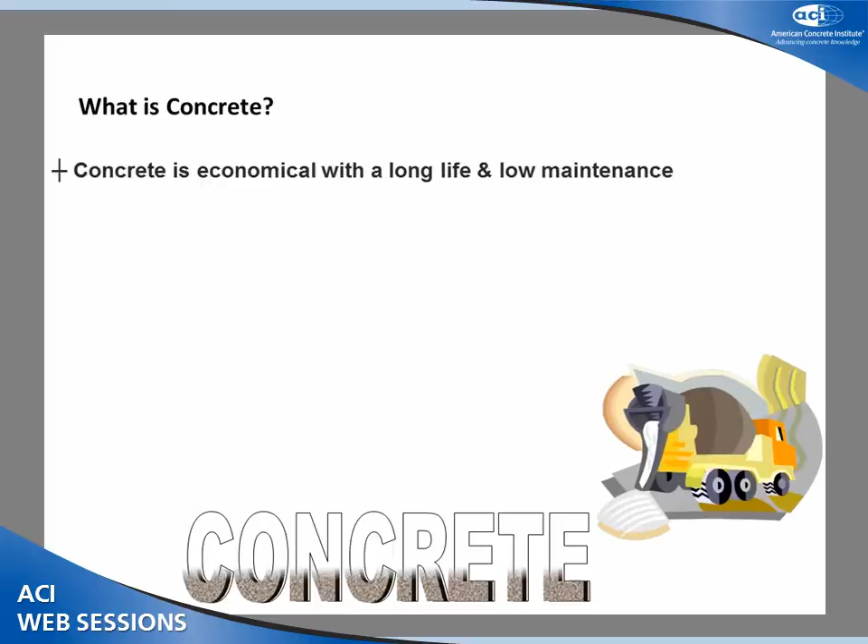So what is concrete? It's a really cool material. It's economical, long life, low maintenance, doesn't rot, cast it in the field, doesn't burn, bugs and critters don't eat it. We use about 12 billion cubic meters per year globally. That's a lot of stuff.

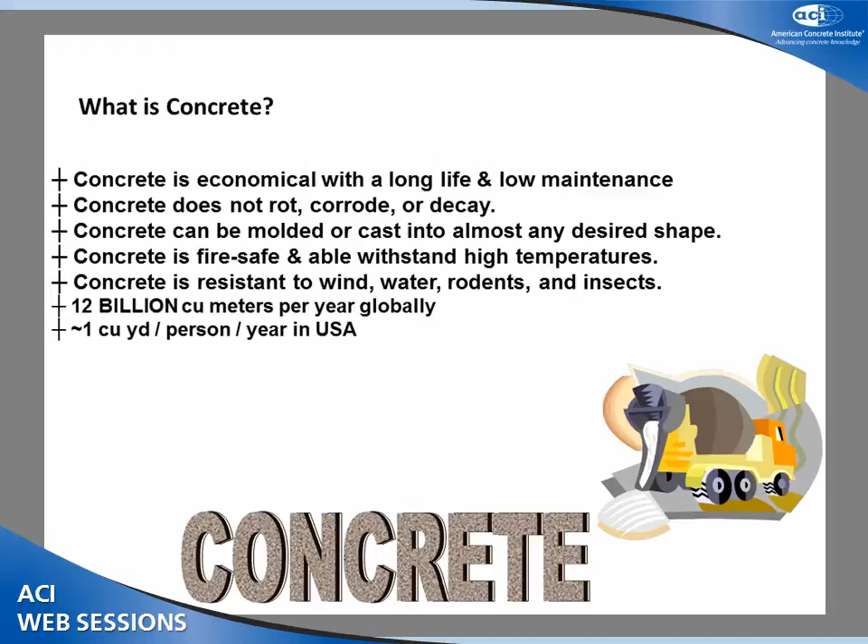In the U.S., about 1 cubic yard per person per year. Since 1930, over 70 billion cubic meters have been used in the U.S., and we currently have about 10 billion cubic meters that are more than 20 years old.

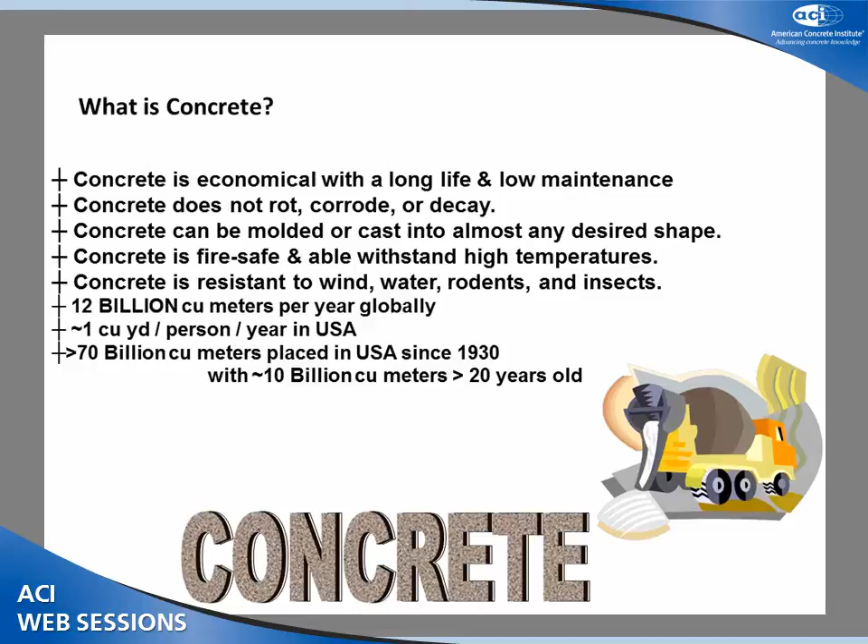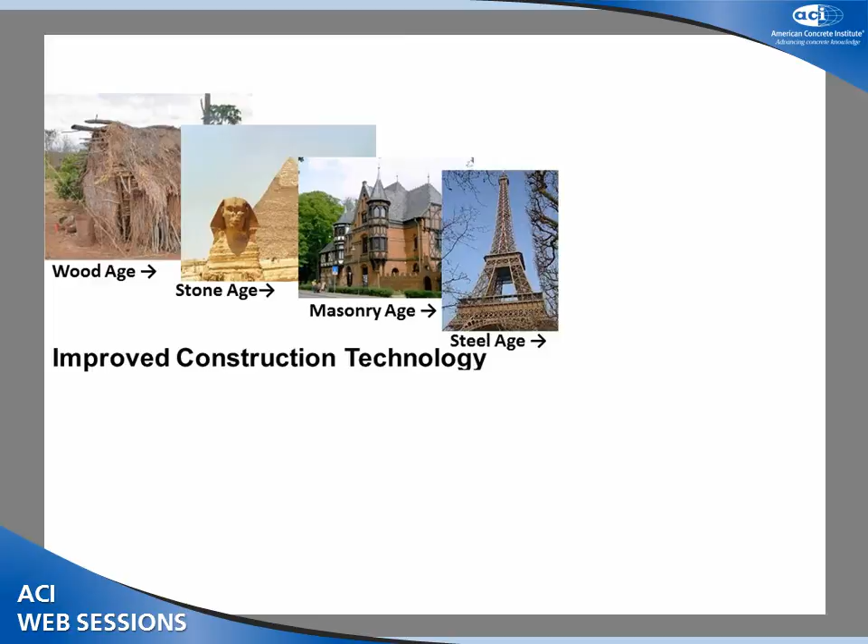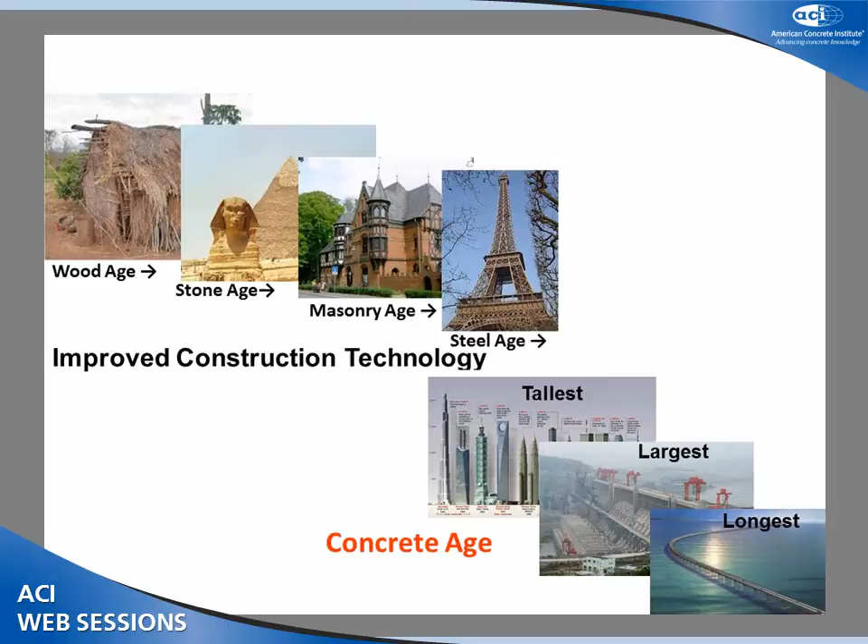So, looking back in history, we started out with the wood age. We got better building techniques. Then we moved into the Stone Age. Then we made synthetic stone and called it masonry. Then the Steel Age. Well, folks, today we're in the concrete age. Our tallest buildings, our largest structures, our longest bridges are all made out of concrete. It's not going to go away. But it's not perfect.

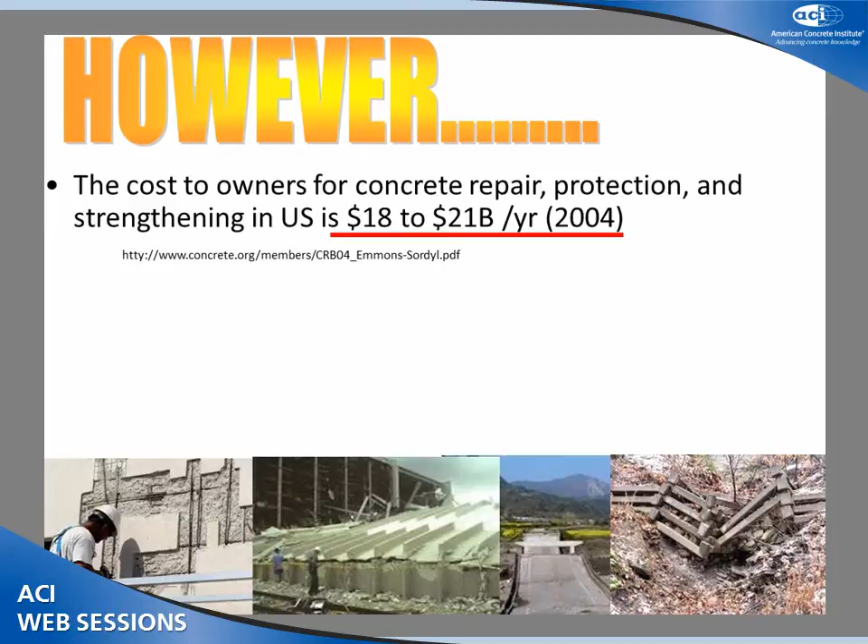Some estimates put the cost of concrete repair and protection at $18 to $21 billion a year in 2004. Just the cost of corrosion of concrete reinforcement, $125 billion per year. Those figures don't add up. Nobody really knows.

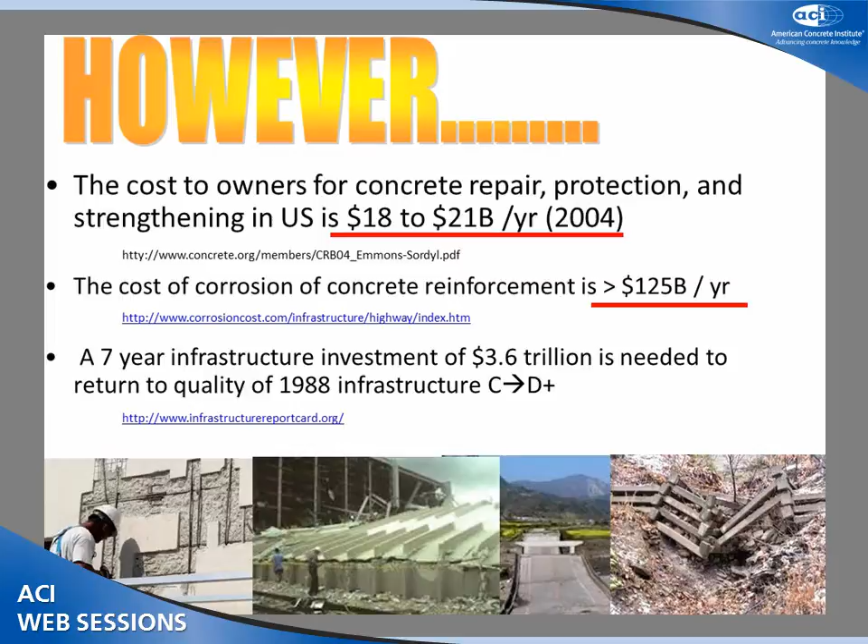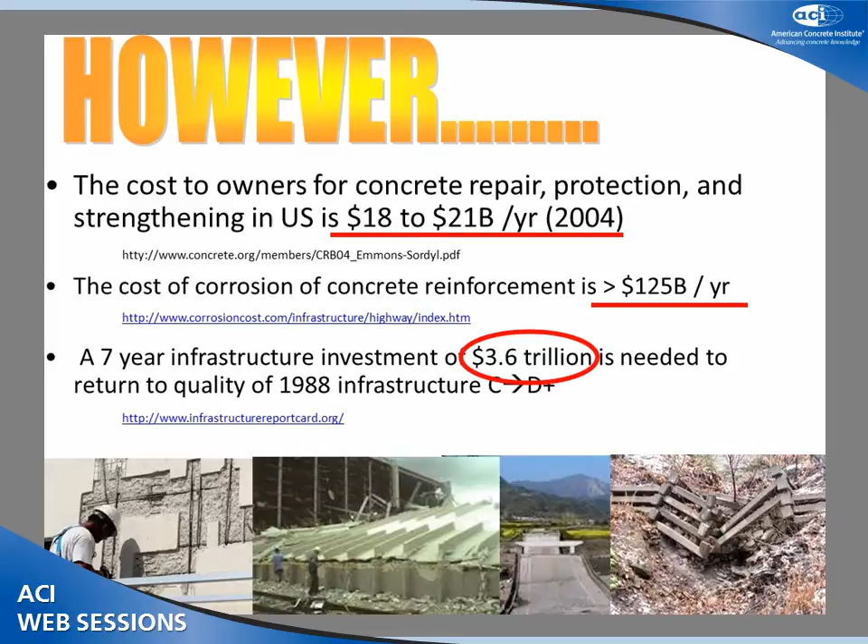Just a couple of weeks ago, the American Society of Civil Engineers came up with a new report card. They say we need $3.6 trillion to return our infrastructure to the quality it was in 1988. That's over the next 7 years. That's a lot of money.

So, being in the concrete repair business is a pretty good business model. It's going to have a lot of work.

Why does concrete fail? I say it fails due to the 3 Ds. It starts out with design and construction errors. This is a very famous example, the Leaning Tower of Pisa. If they paid attention to how the foundation was built, we wouldn't have this famous landmark.

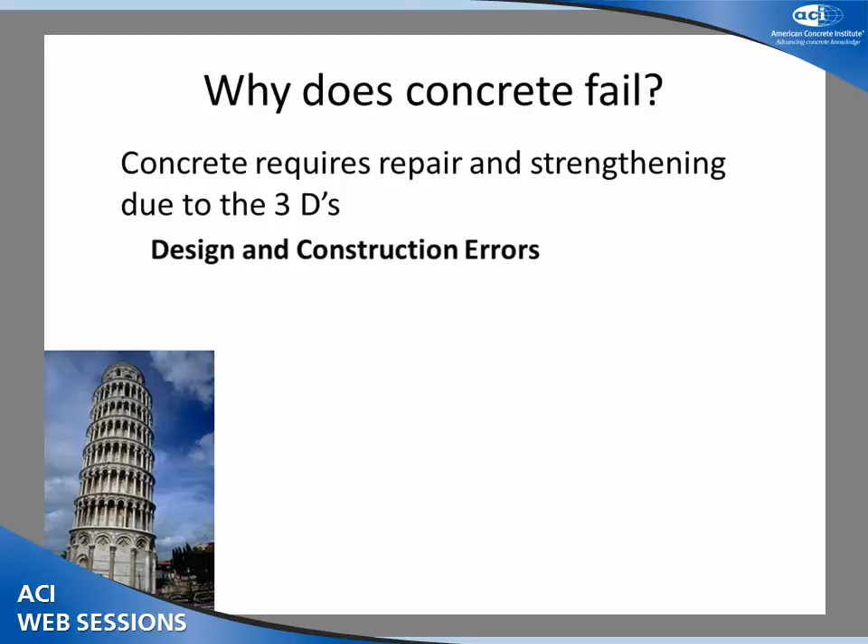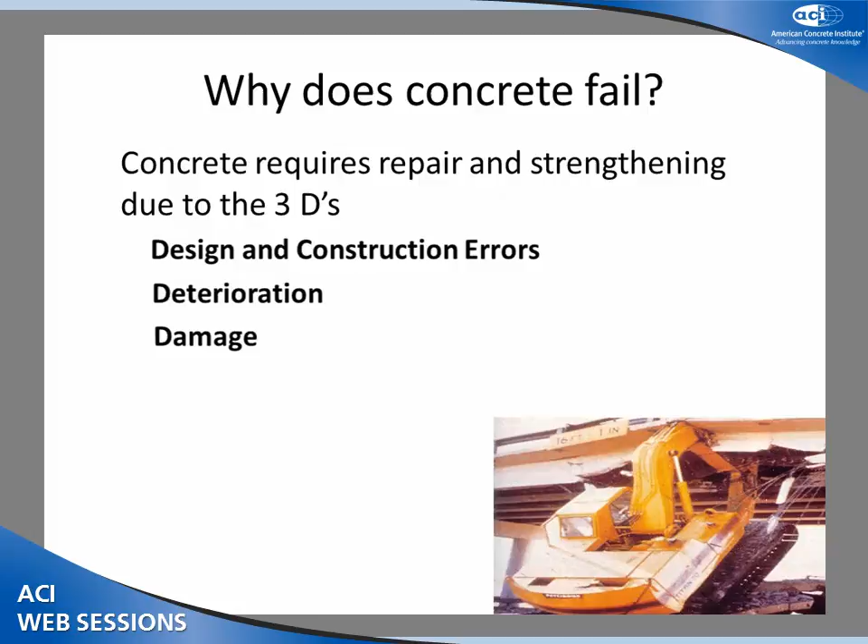Those get magnified through deterioration. That's Mother Nature just doing wear and tear on things. And then damage. Incidents like trying to put a 24-foot backhoe under a 16-foot bridge.

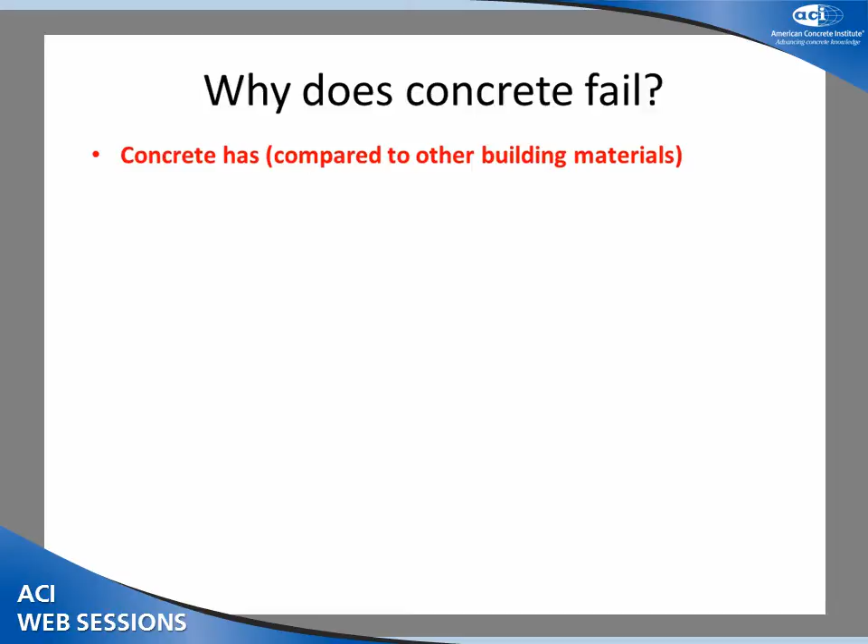So, concrete has some Achilles heels. It's not a perfect material. It's relatively low tensile strength, about 10% of its compressive strength unless you do some funny things like put fibers in it. Low ductility, it's brittle. It's really heavy for as strong as it is.

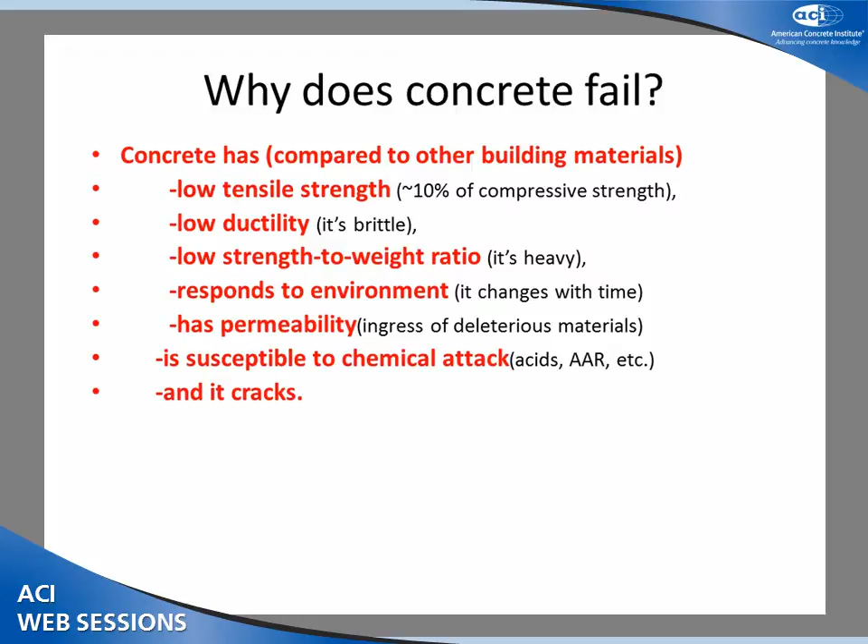It changes with time, responds to its environment. Has permeability. It's a hard, wet sponge. And it doesn't like certain chemicals, especially acids. And it cracks. That's the most common failure mechanism for concrete, it's cracking.

Furthermore, steel corrodes. Anytime you put steel in a concrete structure, you're basically installing a time bomb. Sooner or later, that steel is going to corrode. That's just thermodynamics. It may be 100 years from now, it's going to rust. When it rusts, it expands, and all of these properties change as the concrete ages.

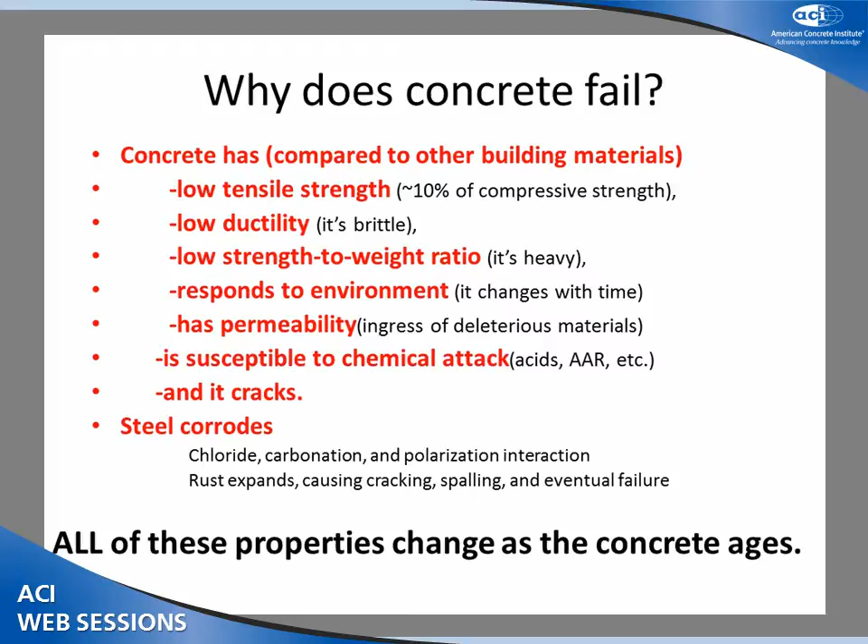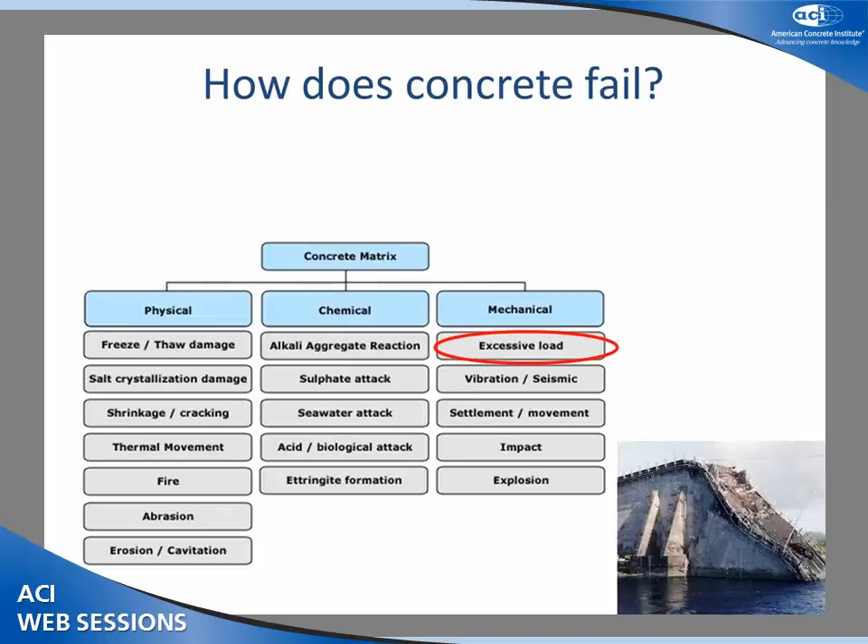A little more detail. We've got freeze-thaw damage, salt crystallization damage, shrinkage and cracking, thermal movement, fire damage, abrasion, erosion, cavitation, alkali aggregate reaction, sulfate attack, seawater attack, biological attack, excessive loads, vibration and seismic incidents, impact, explosion, and reinforcing steel issues with 3 primary mechanisms: carbonation-induced corrosion, chloride-induced corrosion, and stray currents, or polarization changes in the steel.

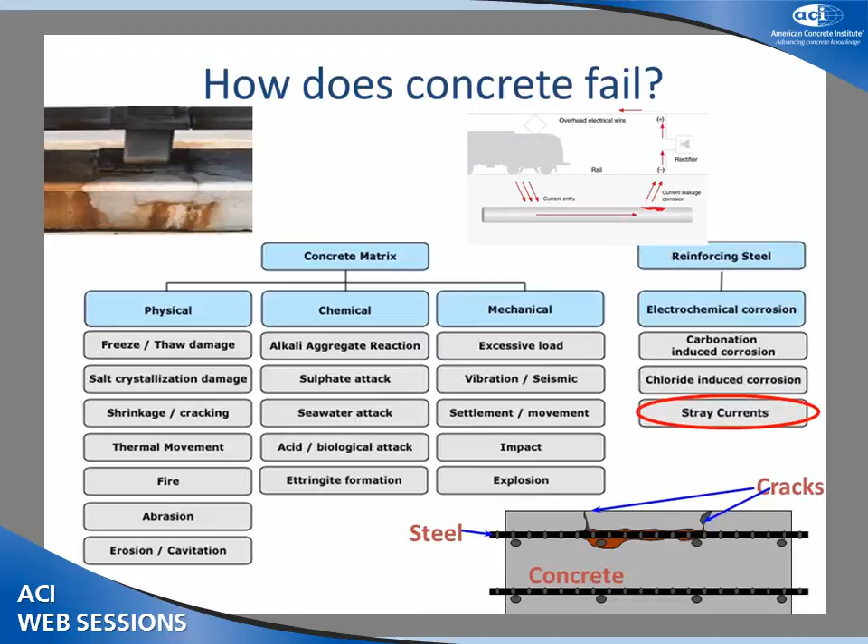All 3 of these work together synergistically as well to make the steel rust.

So what do we do in new construction? This comes from a website I really like, called despair.com. They take all of these motivational posters and change the captions. Mediocrity: it takes a lot less time and most people won't notice the difference until it's too late. Right back there with those design and construction errors.

What does that mean? Usually you inherit the problem, but pay attention to the design. If you only got decent cover over the reinforcing steel, you solve so many problems. Bear in mind that reinforcing steel doesn't stay where you think it is when you place the concrete.

Use a low water to cementitious material ratio, and use admixtures as appropriate. They allow you to tune the mixture to do wonderful things. Have the proper consistency for what you're trying to place the concrete at, and make sure it's well consolidated.

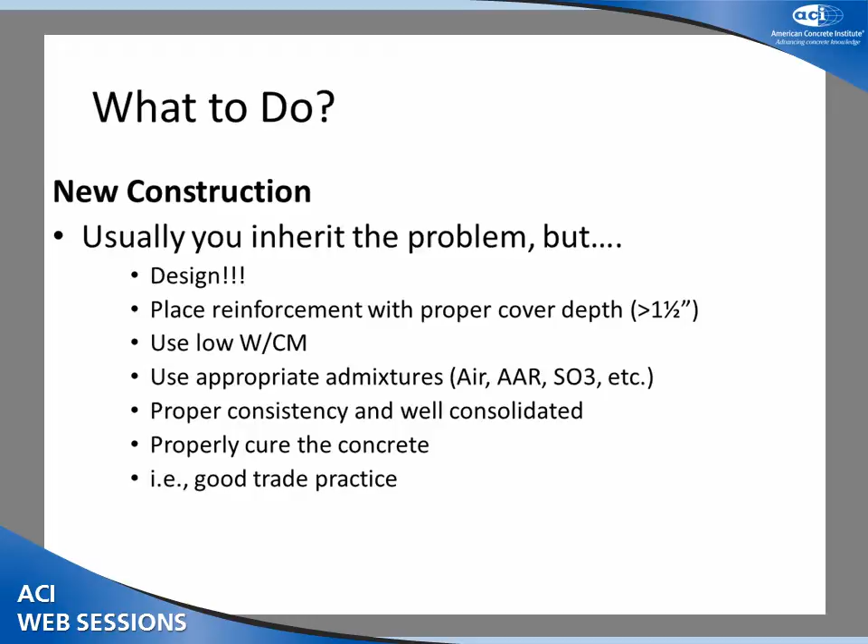Above all, properly cure the darn concrete. Keep the water in it until the cement can hydrate. In other words, read ACI. We've got all of this documented. We collect our collective wisdom and publish it in documents. Bottom line, the devil is in the details.

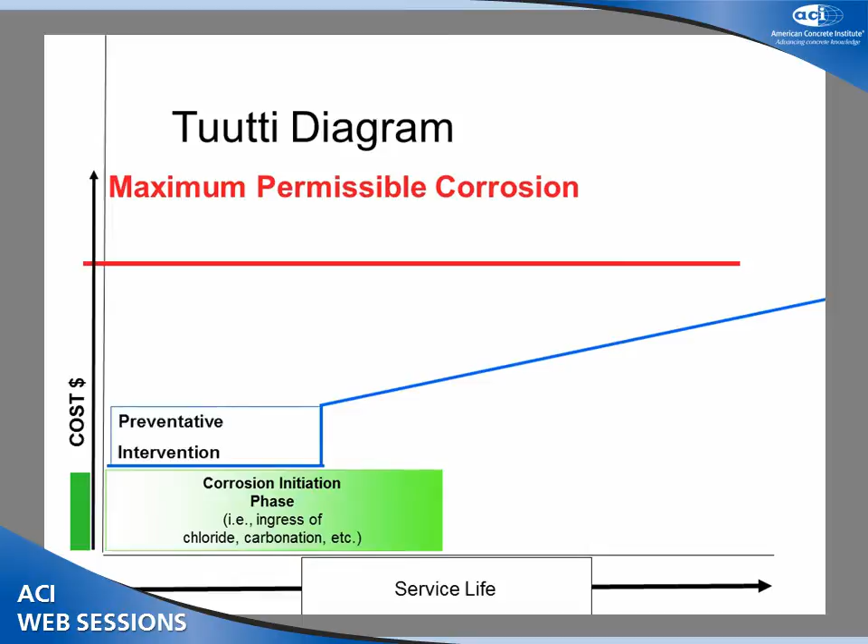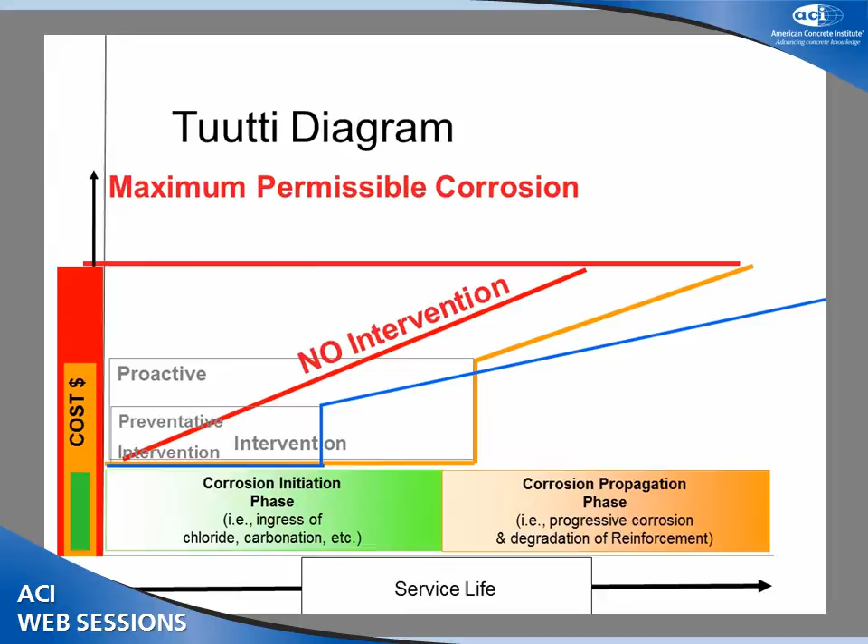Now, Tuutti is a Swedish professor, pretty well known about corrosion and so forth. What he says is, initially, if I catch corrosion in concrete reinforcing steel, I have a low cost. The longer I wait, the shorter the time the structure lasts and the higher the cost. Doing nothing is the highest cost you can have. So what does that mean? Do unto your future before your future does unto you.

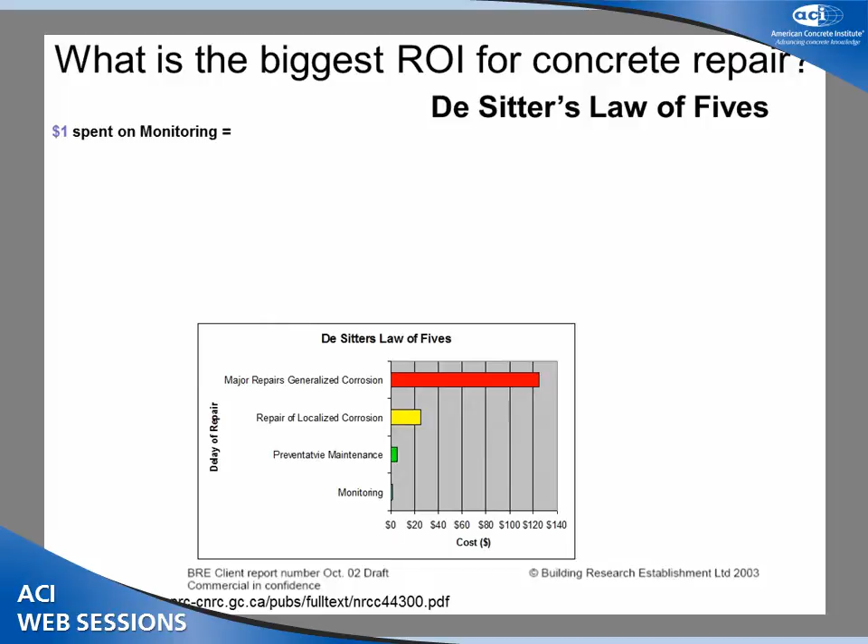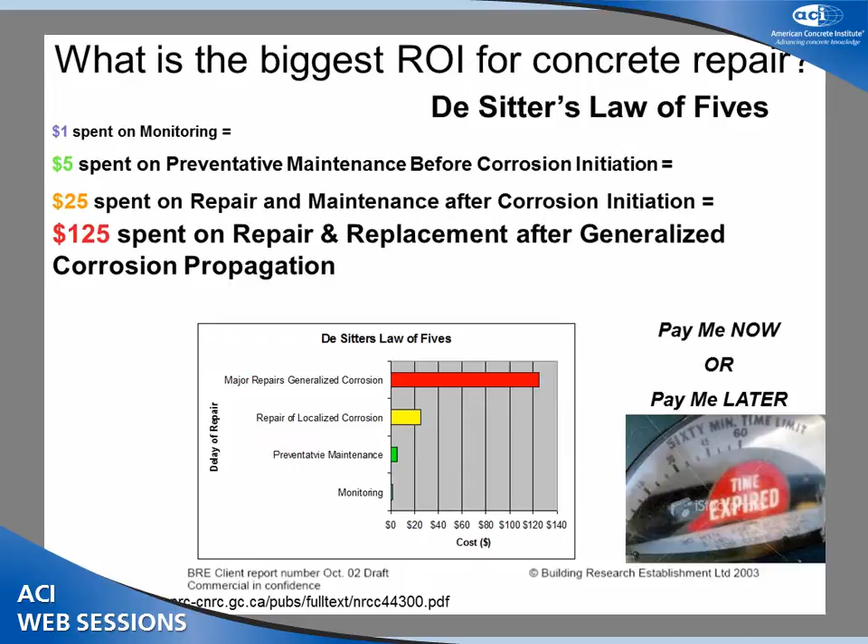Another guy I really like is De Sitter, I think he's from Denmark. He has something called the Law of Fives. He found that if you spend $1 installing monitoring in a structure so you know what's going on before it's too late, that's the same as spending $5 on preventative maintenance before corrosion initiates, $25 on repair and maintenance after it's initiated, or $125 after you've got generalized corrosion, that is rust coming out of the cracks in the concrete. So you can pay me now or pay me later.

In concrete repair, in the process, what you see are the effects of design, durability, and deterioration and damage. You better figure out the cause. One of the beauties of the concrete repair industry is you're going to get the chance to do it all over again if you don't. Then you make a decision: do I repair or not?

A lot of that's determined by how well the concrete was maintained. The trick to concrete repair having a long life is never having to do the repair, to keep bad things from happening before it's too late. Unfortunately, all too often we get to the repair, and this is our option: demolition.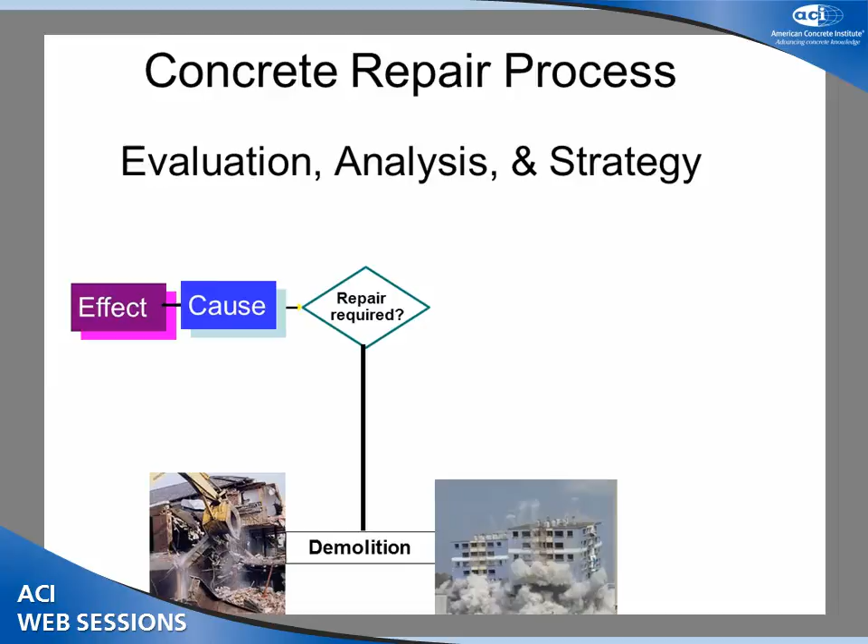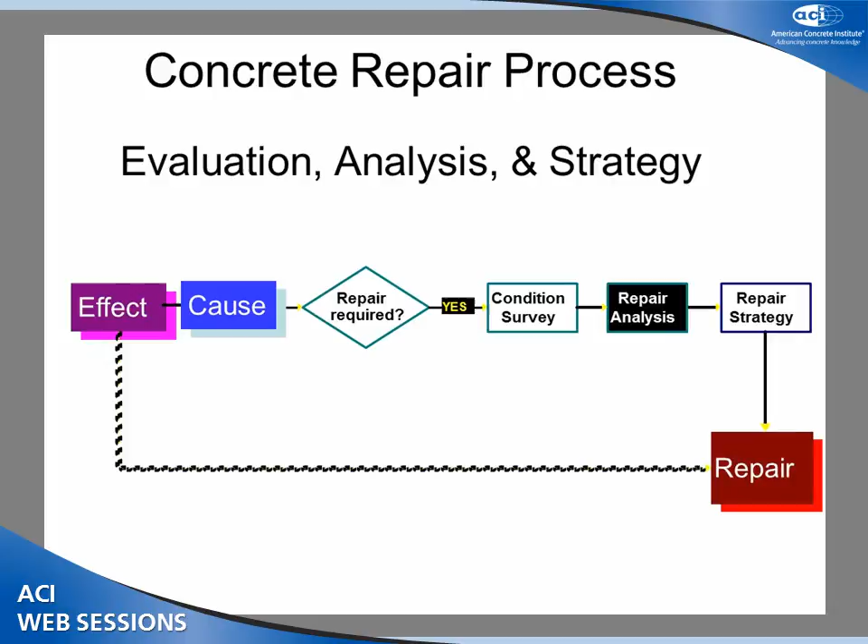But if you're going to repair, do a condition survey. Find out how bad the situation is. Analyze the repair. Develop a strategy. Do the repair. And do maintenance on that repair.

A little more detail. There's the 3 Ds, as shown by leakage, settlement, wear, spalling, disintegration, cracking. Is repair required? Is it a life safety issue? Is it leakage? Is the structure any longer functional? Does it just look plain ugly?

The condition survey: you evaluate, quantify, and document what's going on. Your repair analysis considers both what the owner wants, he's the guy that's paying the bill, and what's possible to do as an engineer. The repair strategy, all three of these came down at the same time. What kind of surface preparation do I do? What's my materials options? What's my methods for doing the repair?

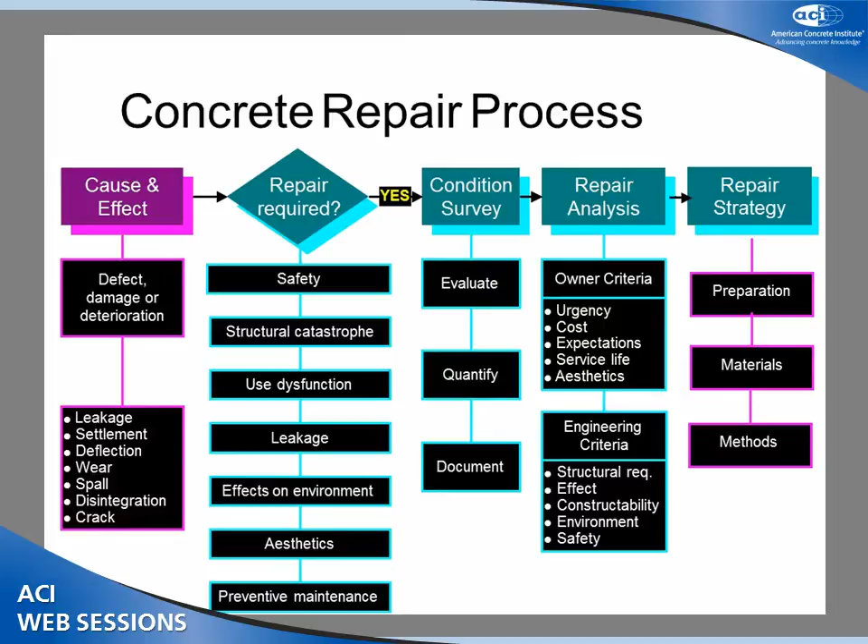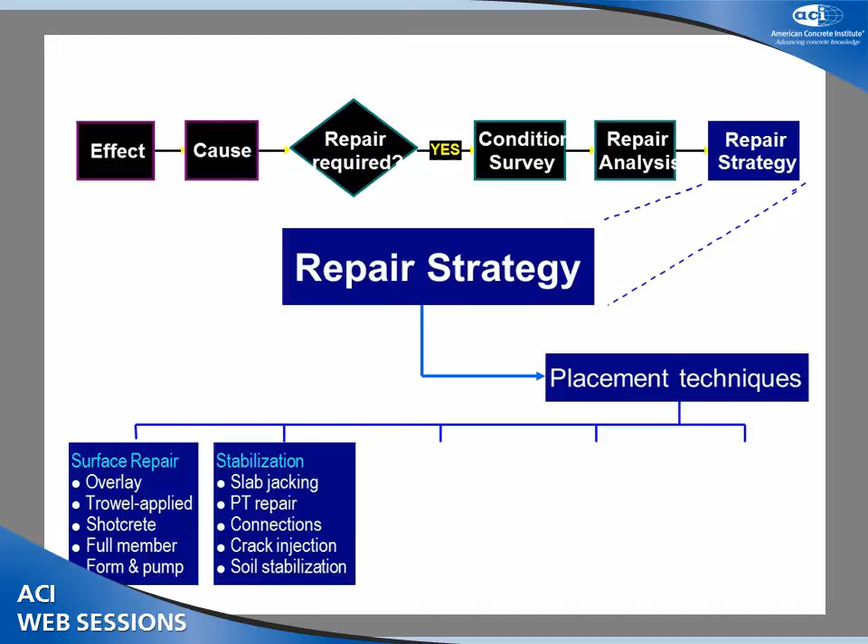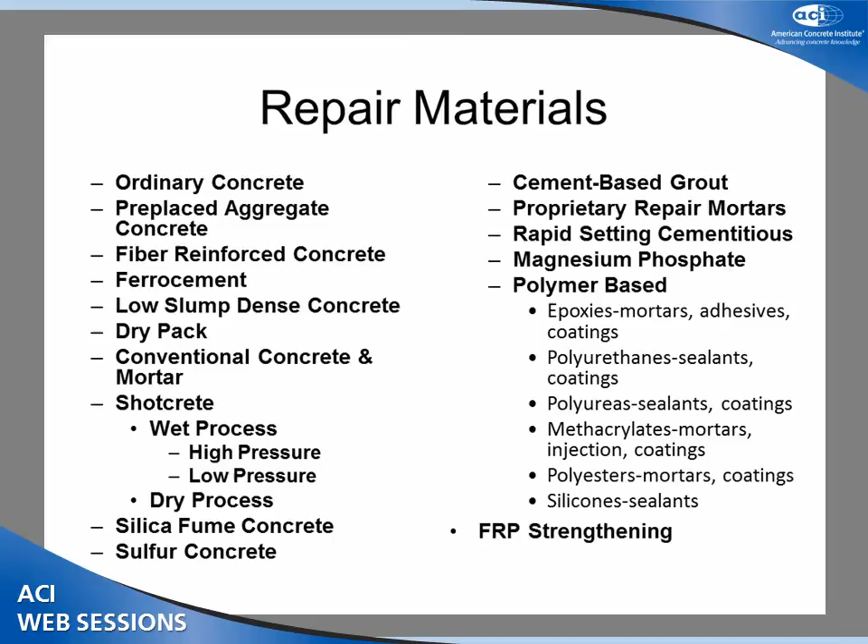A couple of comments on that. We've got all kinds of placement techniques for surface repair, stabilization, protection, waterproofing, and strengthening. We've got all kinds of repair materials. These are the ones listed in ACI 546. Each one is appropriate in some situations, but not in others.

I really like this diagram, probably because I drew it. What this says is, how big is my repair? That determines not only how I mix it. If I'm just mixing less than 1 unit, fixing a couple of cubic inches, I don't even think about shotcrete or mobile mixers. I'm mixing it in a trowel and pail or a drill and pail. And it's pretty much always a hand application.

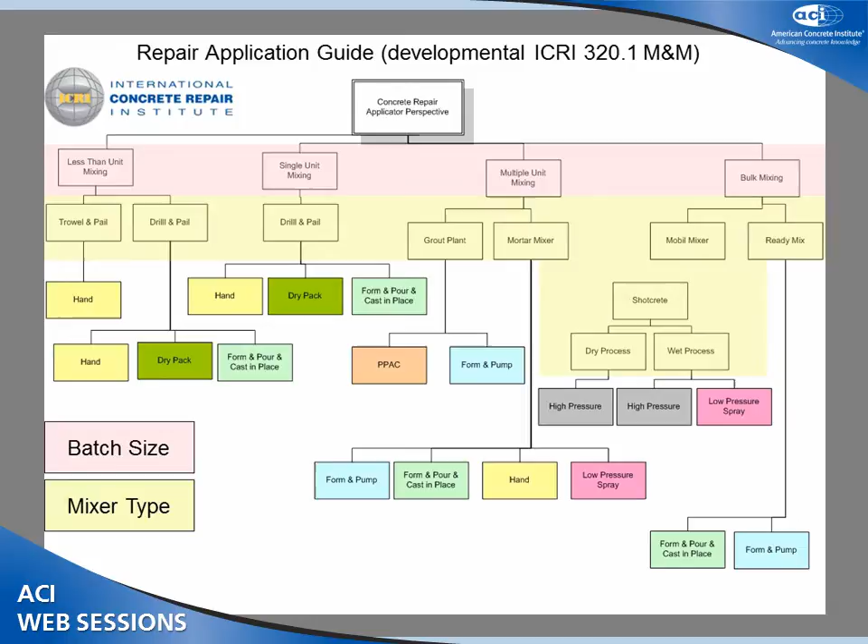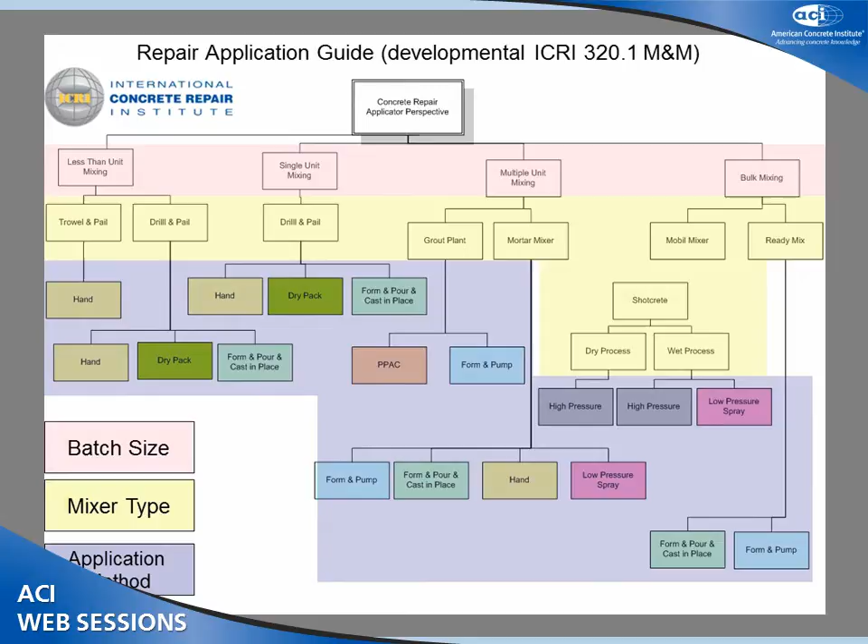When I get serious and start mixing multiple units, cubic feet, I'm going to be doing a drill and pail, or maybe a grout plant, or maybe a mortar mixer. And that further determines what kind of applications I'm doing. I'm no longer just doing hand repairs, I'm doing things like pre-placed aggregate, form and pour, form and pump. With shotcrete, I'm getting really serious about things.

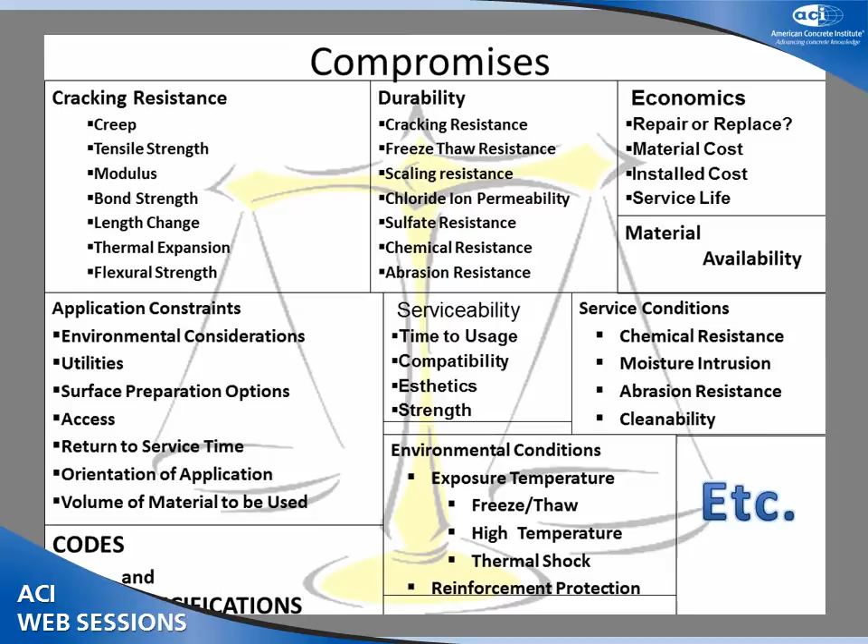Bottom line, selection is a series of compromises. Try to balance all of these factors to make the best decision. It's not easy. We're working on getting there, but trying to think about all that makes my head hurt and where my hair went.

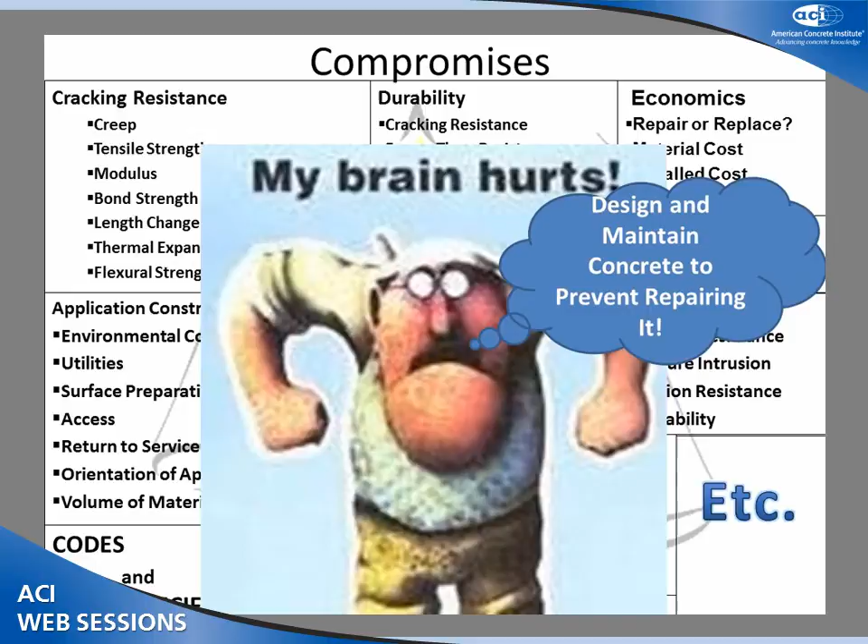So the trick is to design and maintain concrete to prevent having to repair it. Now, what I was actually supposed to be talking about is early age repair material properties. So in existing construction, the real secret to concrete repair is knowing who to blame for your failures.

Okay, so I inherit the problem. Address the problems early in the life cycle. Find the root cause of what's going on. You get a chance to do it over. Fix cracks, little cracks tend to become bigger cracks. Yes, there is autogenous healing that can happen. Don't bet on it.

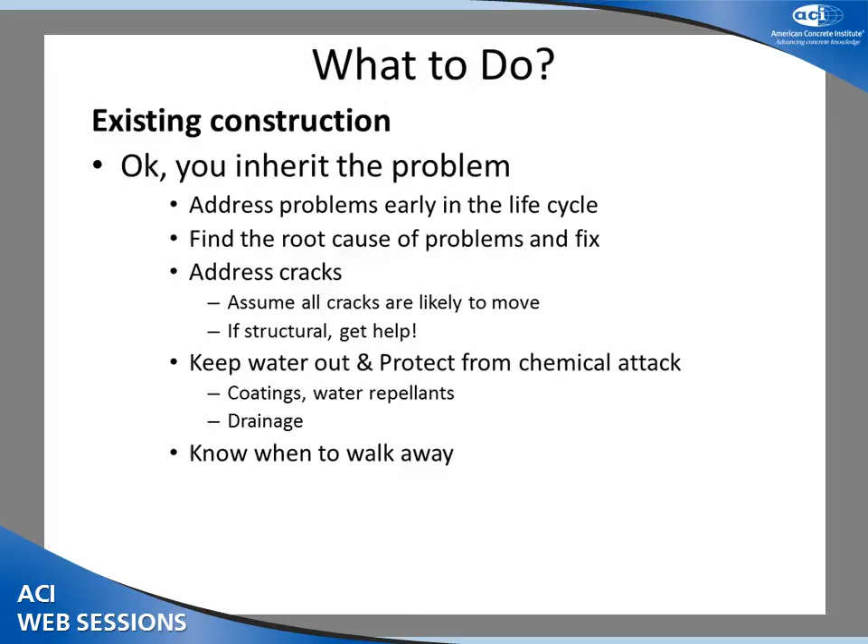Keep the water where you're going to need it while you're curing the concrete, and after that, keep the water out. If you keep the water out of the concrete after it's cured, so many of your problems go away: no more freeze-thaw deterioration, sulfate attack, alkali aggregate reaction. And know when to give up and walk away.

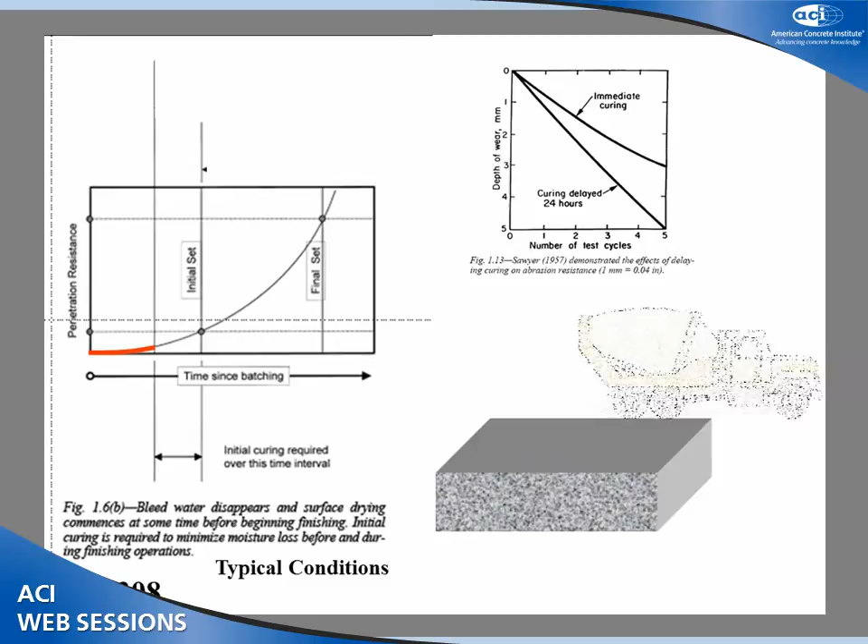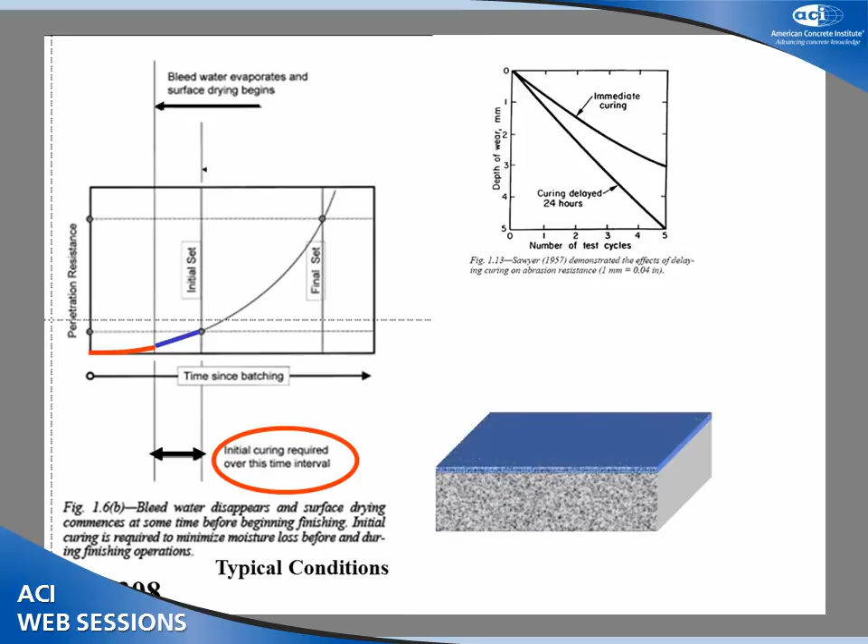Okay, a little bit about curing. Anybody know what initial curing is about? Initial curing is I got the concrete placed, the bleed water has disappeared, but it ain't strong enough to finish yet. I get all these plastic shrinkage cracks. So by doing initial curing or intermediate curing before I can finish it, I'm keeping the water there where it belongs.

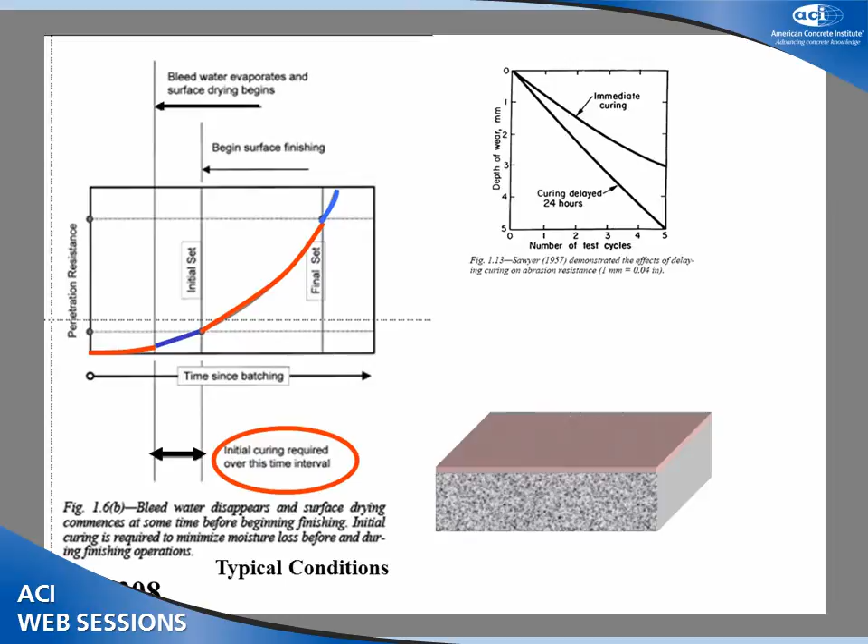Now I finish the concrete and I perform conventional curing. This doesn't cost a whole lot of money and it solves a lot of your problems at the get-go.

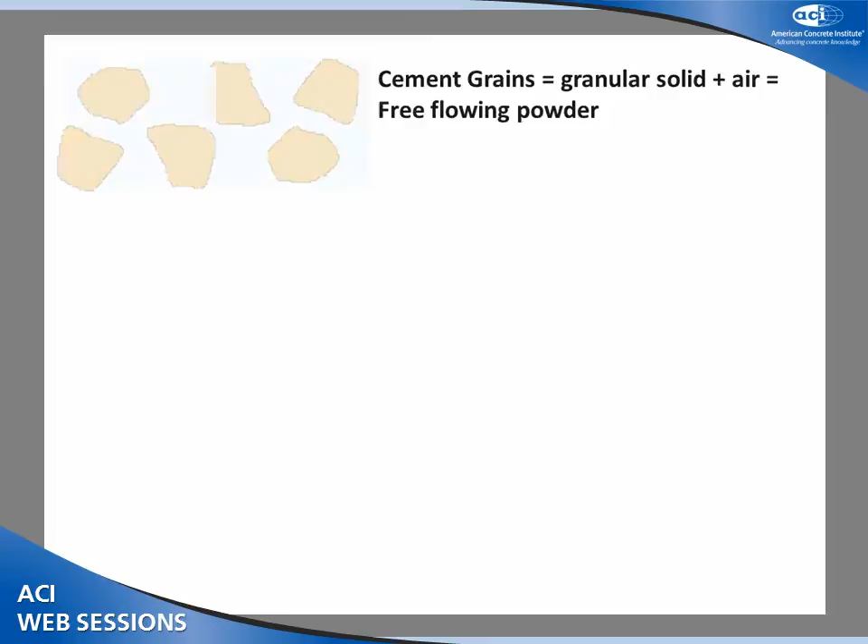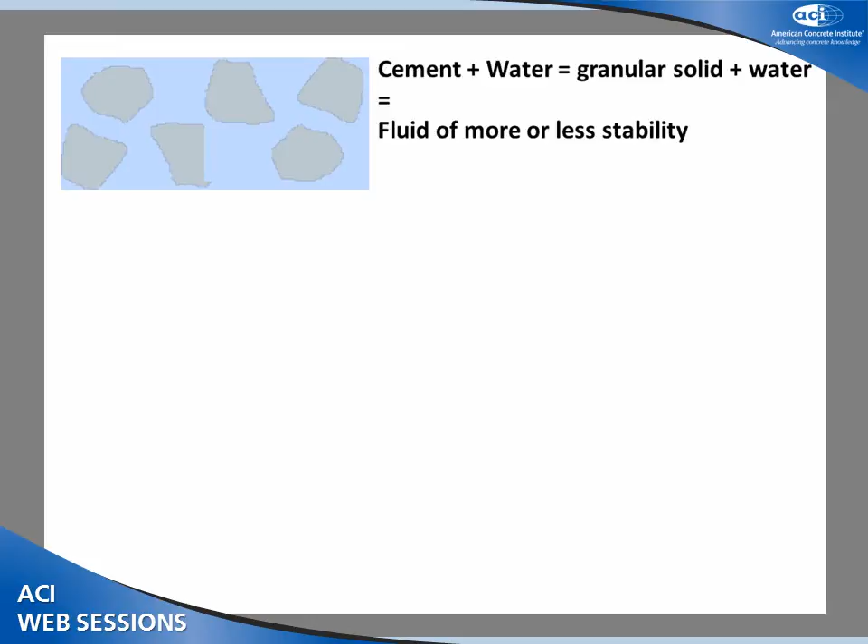When we start out with cement, we got cement grains. It's free-flowing powder. You mix it with water. Now you get kind of a suspension of particles in water as more or less stable mixture. Bleeding is when it ain't so stable, and I can get settlement shrinkage. I place the concrete.

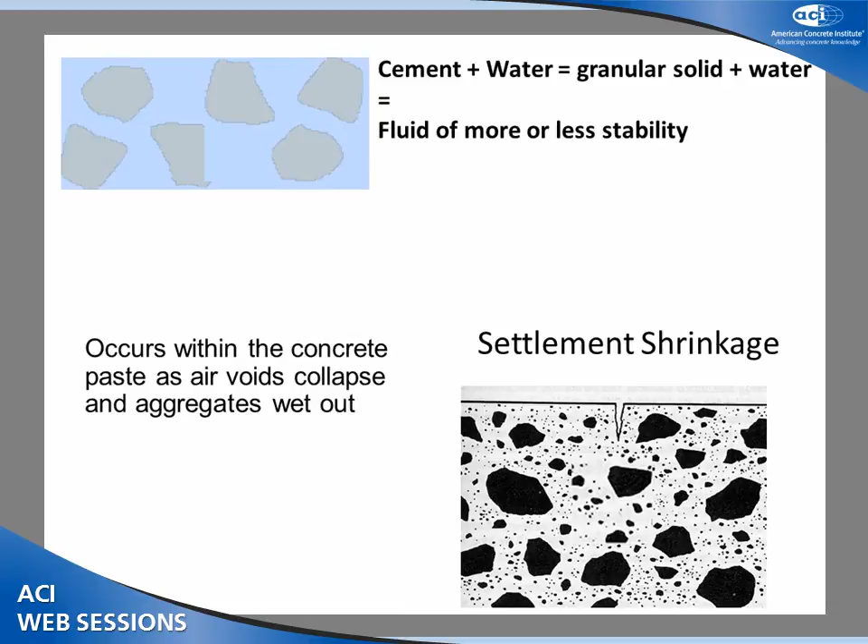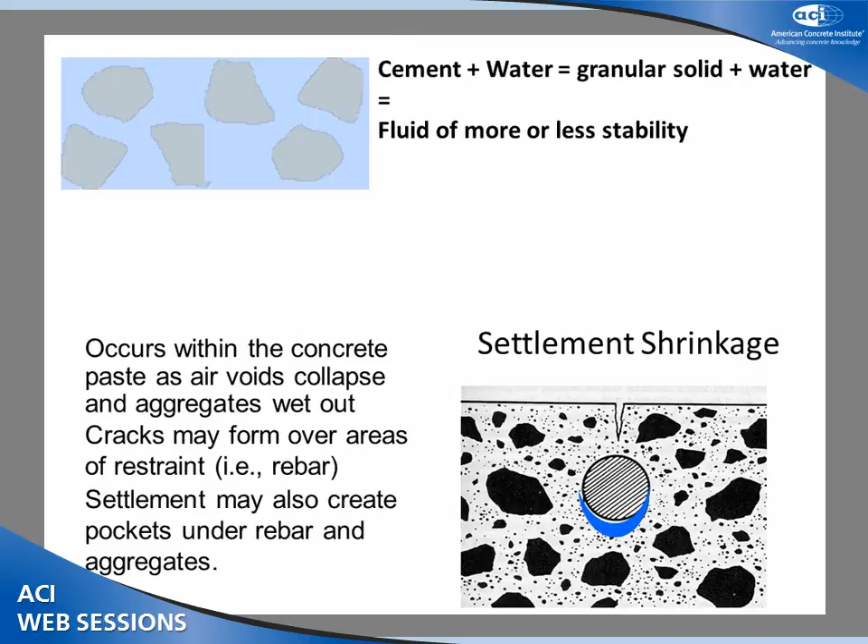The paste moves as air voids collapse, aggregates wet out. I get cracks forming over the rebar. I can get pockets of settlement underneath the rebar that fill up with water. I get all these problems: plastic shrinkage.

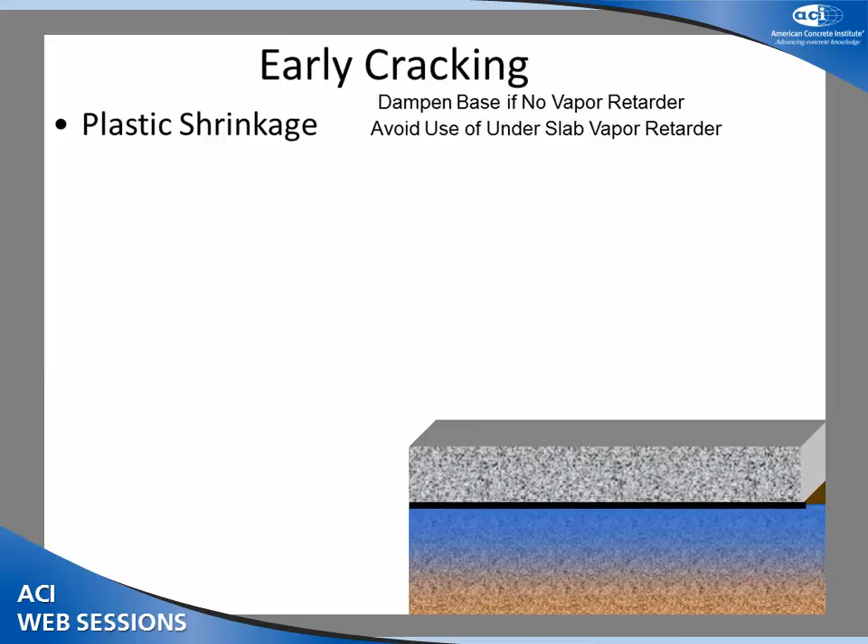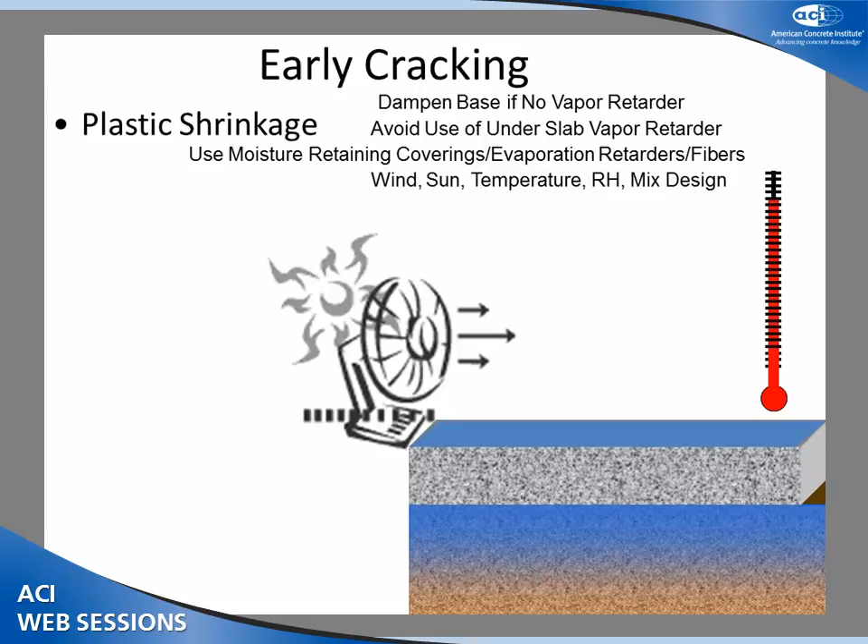So the water sucks into the substrate. I get cracking, so I need a properly dampened substrate. If I use a vapor barrier, that can be good or bad depending on what I'm trying to do. If I'm putting a moisture retaining covering or coating over it, that's a good thing - Mother Nature's trying to take the water out of it.

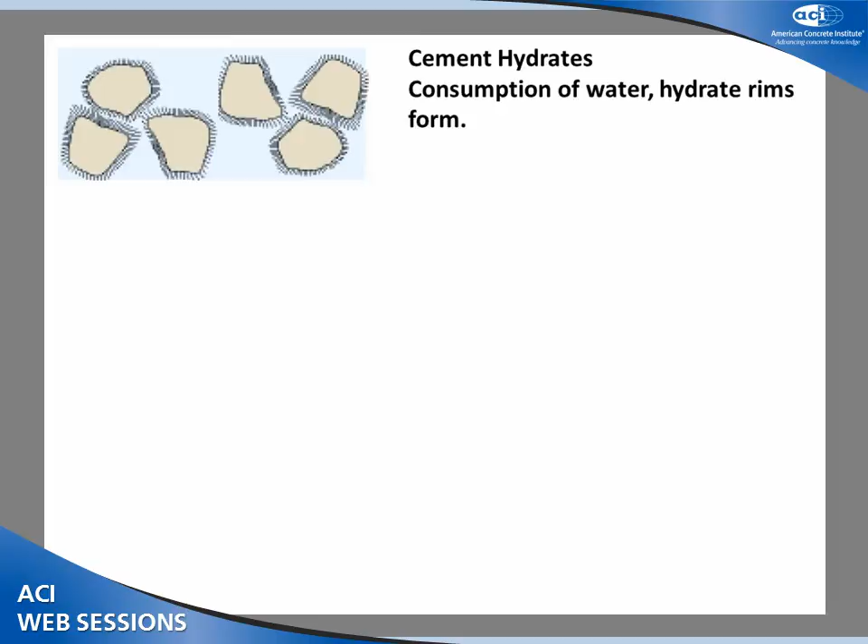So now the cement hydrates a little more. It gets into these fuzzy particles. It consumes some of the water. I get hydrate rims forming. Viscosity of my material starts to thicken. I get shearing action, but it can be replaced by new hydration product.

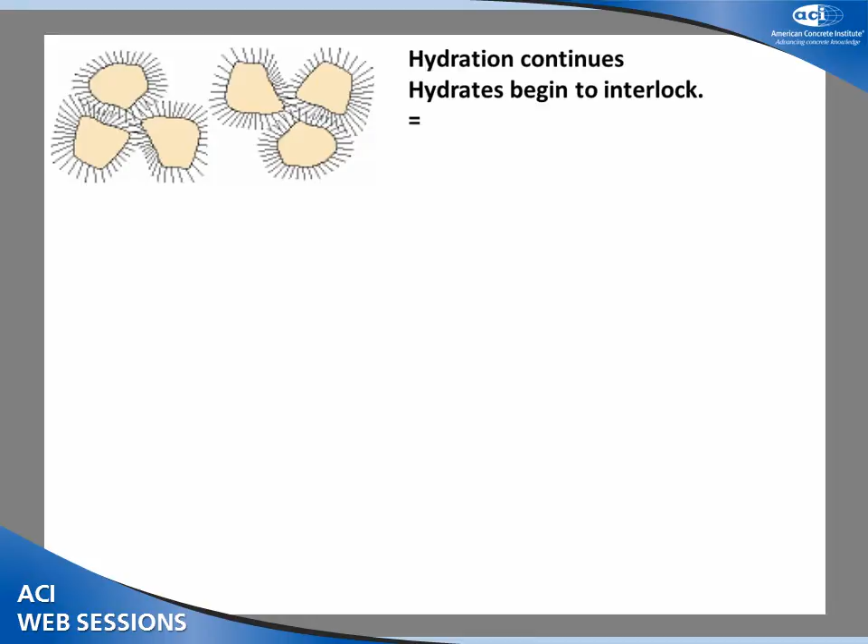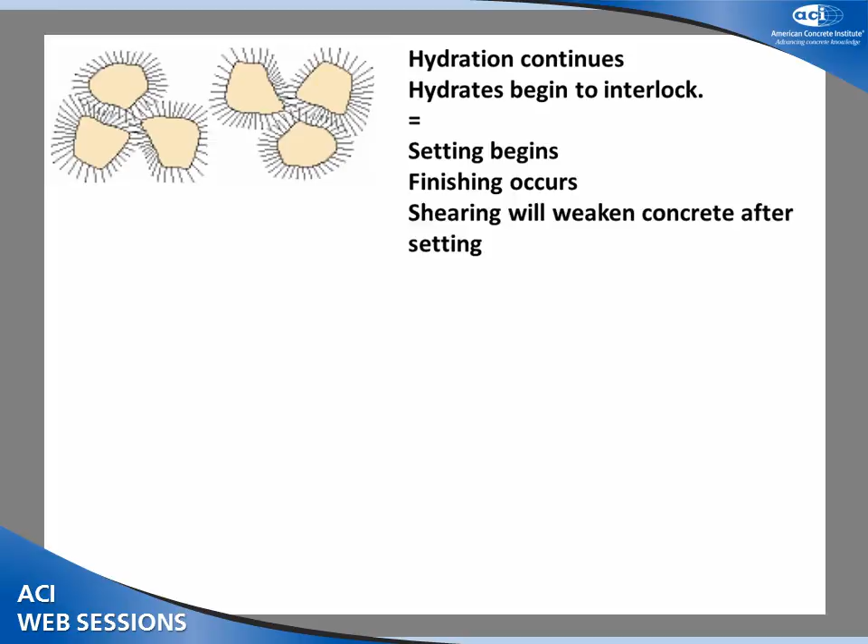Eventually, though, those hydrates start to interlock. That's when setting begins and finishing occurs. If I disturb it during this phase, I've just broken those hydrates off. They're less likely to reform. I've caused damage. At early ages, when this is going on, I've got a lot of creep.

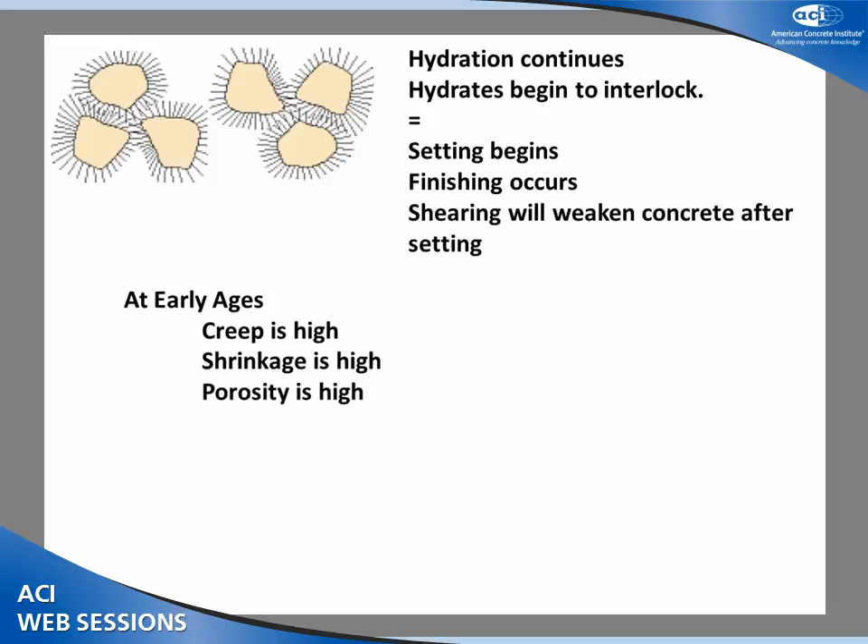I've got a lot of shrinkage. Those kind of trade off. I've got a lot of porosity. My strength is low.

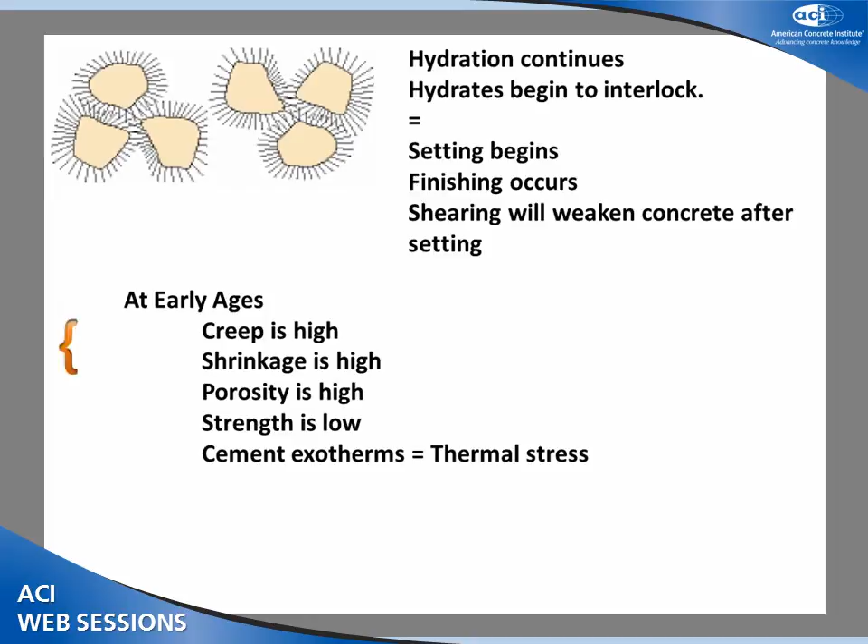Cement, as it hydrates, is exothermic. That can create thermal stress. As I said, creep and shrinkage kind of trade off with each other.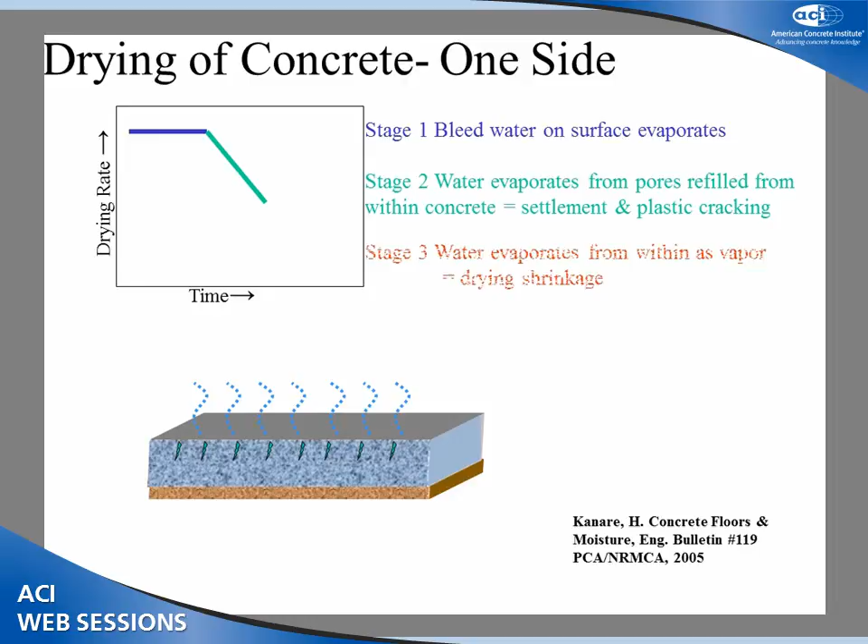How's concrete dry? Well, first I got the bleed water on the surface. It evaporates. Then the water evaporates from the pores and is refilled from within the concrete. And then finally water evaporates and I get drying shrinkage.

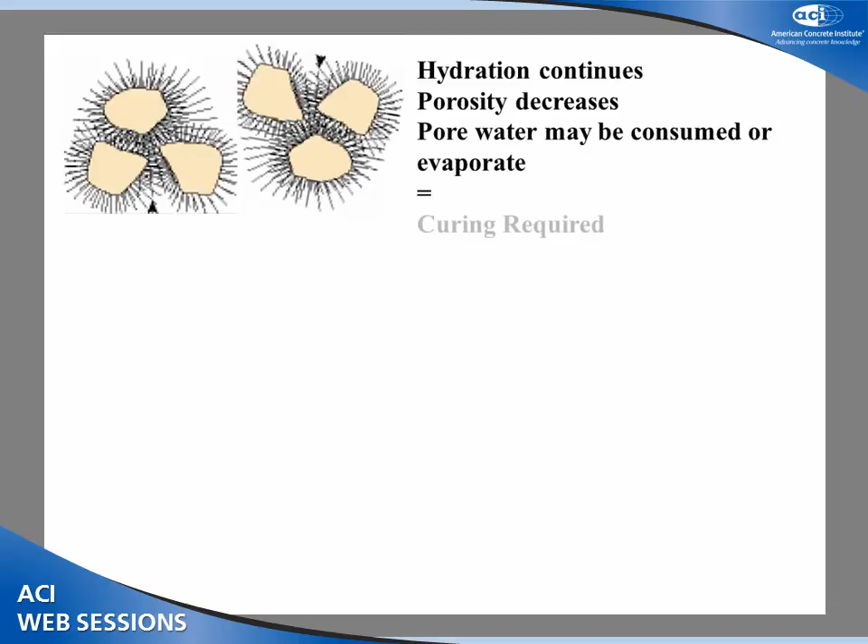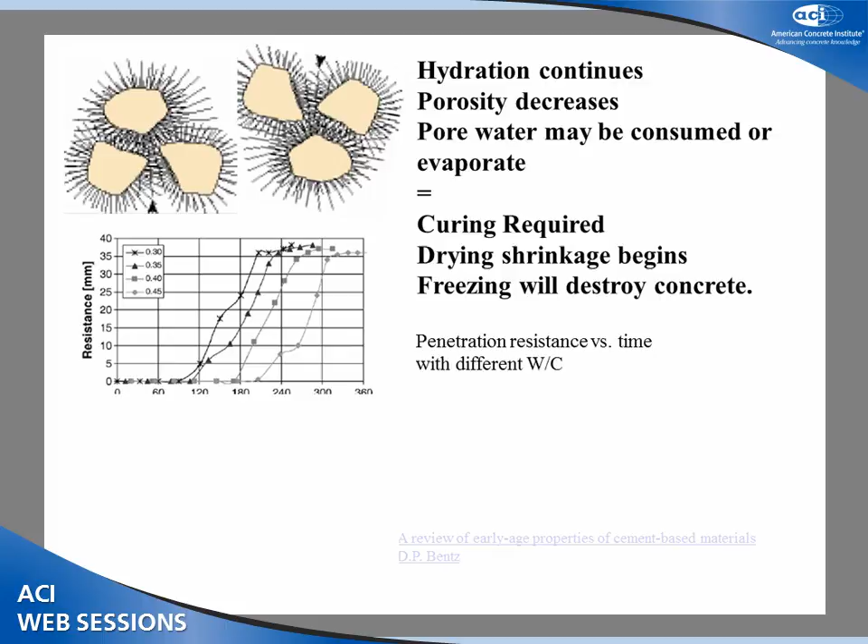Hydration continues, porosity decreases, pore water may be consumed or evaporate, curing is required. Drying shrinkage begins, freezing will destroy the concrete unless it's strong enough. Penetration resistance versus time: here's strength, there's time, different cement mixtures, different water-cement ratios. And porosity - it decreases with time.

Curing: if I moist cure the entire time, I get 125% of what I get if I only cure for 7 days. If I only cure for 3 days, I'm down about 25%. And if I air cure the entire time, about 50%. This is right out of 308.

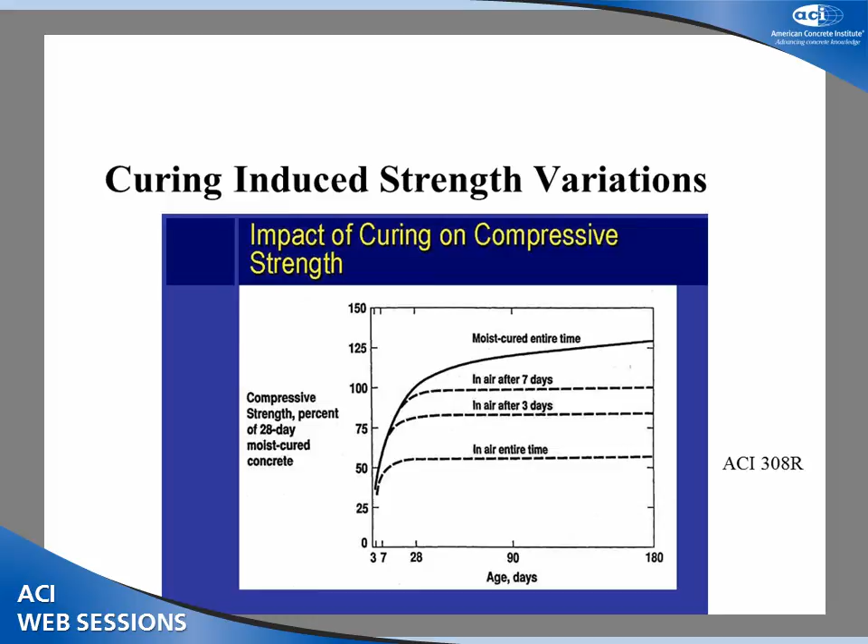Permeability - this shows water permeation with respect to time for different water cement ratios. Look at this guy, high water cement ratio, it's a sponge.

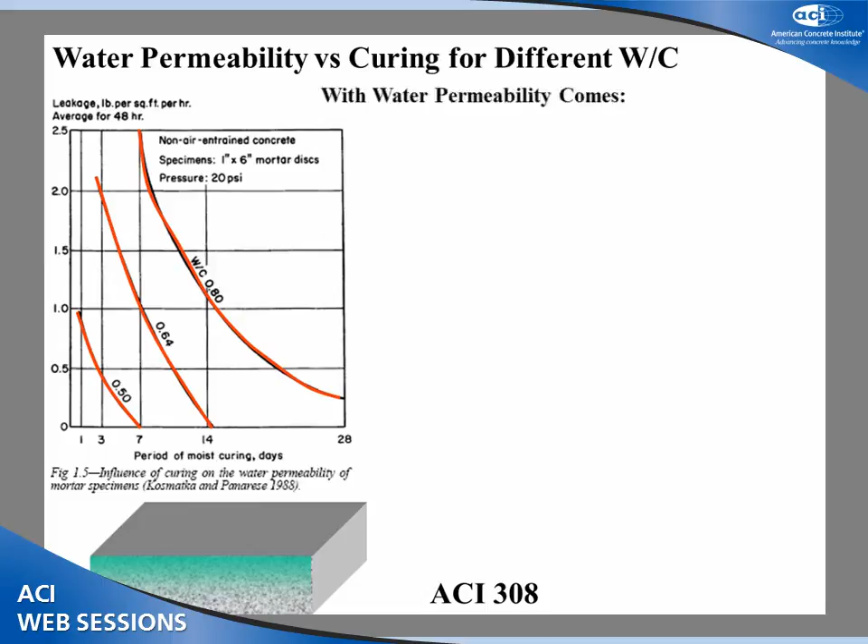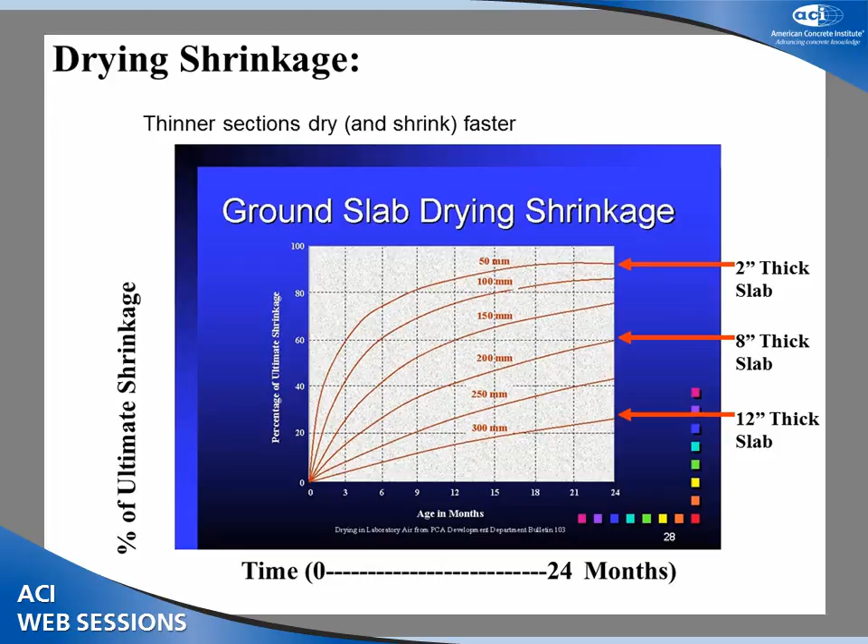With water permeability, a lot of bad things happen: chloride ingress, freeze-thaw deterioration. Drying shrinkage changes with respect to time, it eventually slows down. How thick is it? How much surface area? What's my surface to volume ratio? Shrinkage is faster at earlier ages.

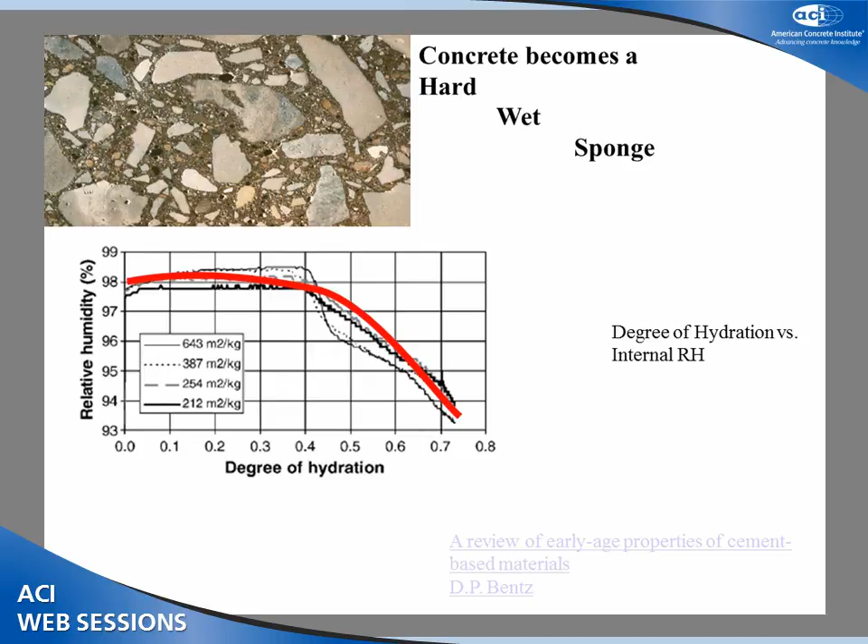Eventually, concrete becomes this hard, wet sponge. What's the degree of my hydration versus internal relative humidity? The water is consumed, continues to use the water as it hydrates.

Furthermore, responding to the environment, if I have dry concrete and it gets wet, it swells. And if I go through these cycles, I get reversible shrinkage, but I can also get some expansion.

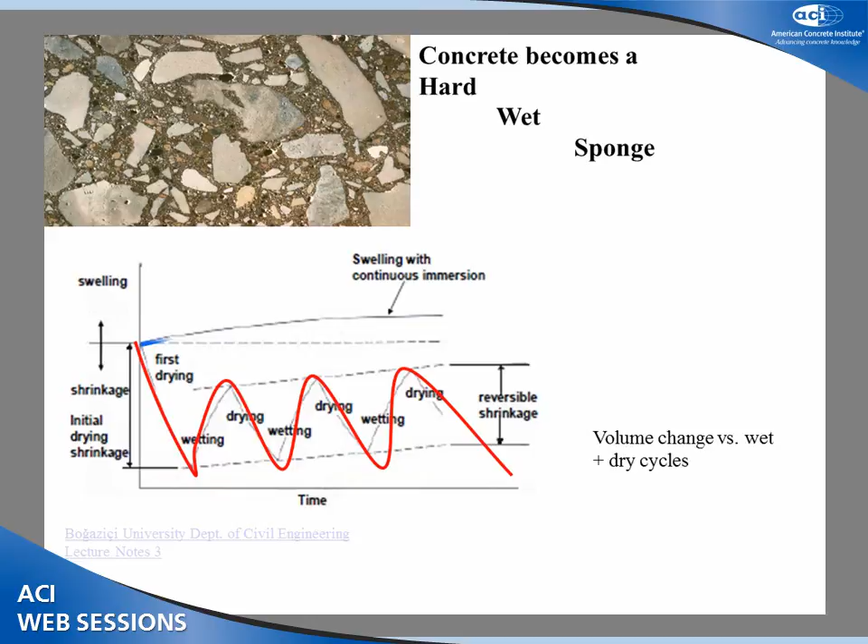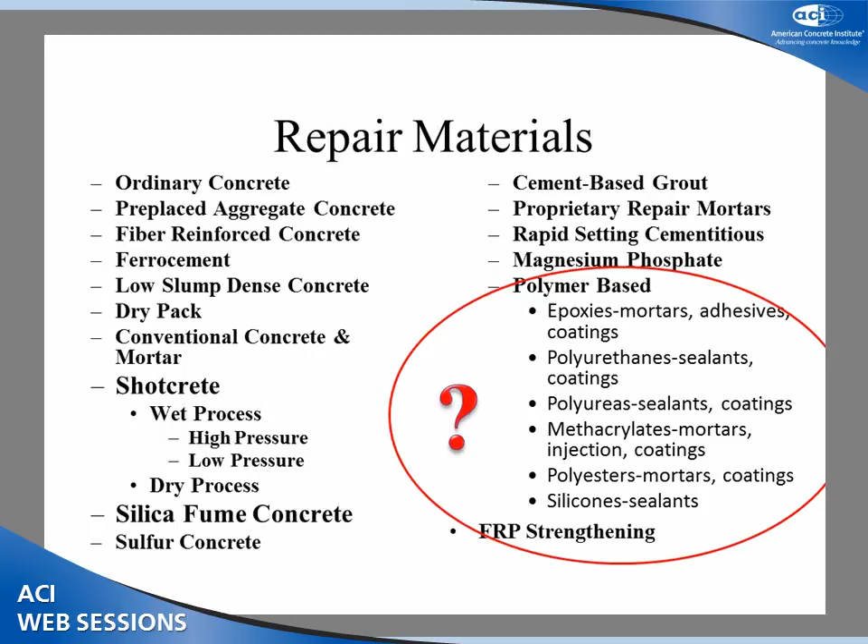Looking at repair materials, what about polymer-based materials? Haven't said anything about it. I'm a cement head. I wear the funny white coat in the lab and the funny glasses. You all can talk circles around me with polymer material, so I only got one slide on it.

Polymers, as they polymerize, I've got shrinkage, but I've also got high creep. And I've got an exotherm. A lot of that seems to happen at about the same time, so it offsets.

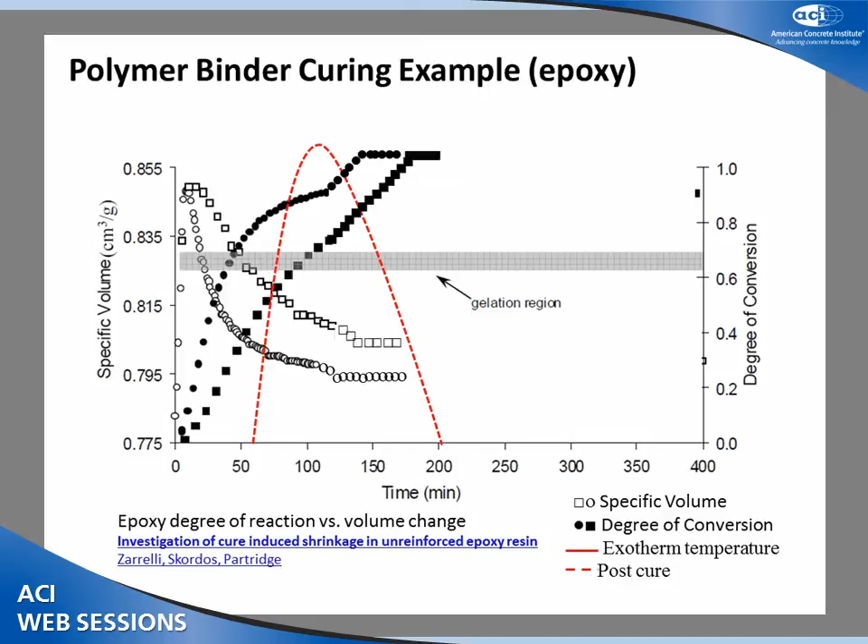However, I can also post-cure - that's heated up after it's already hard. It gets stronger, it gets denser, and I get a small volume change that happens then.

So I had 20 minutes to talk about a lot of stuff. I know I went really, really fast. I'll try to answer any questions you have, and I thank you very much.